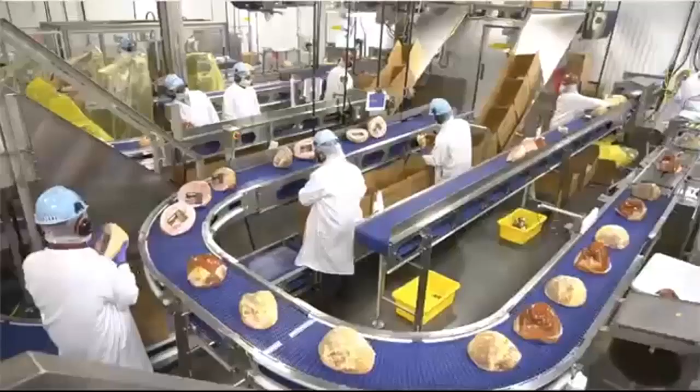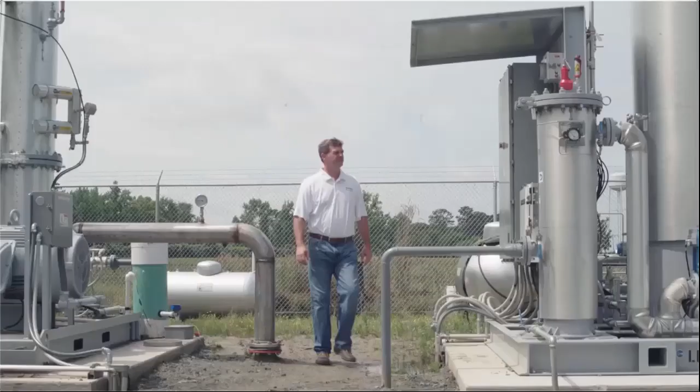At Smithfield Foods, we're dedicated to producing good food responsibly. As a global food company, we're committed to doing business sustainably throughout our entire supply chain. That's one reason why we were the first major protein company to set an ambitious goal to reduce our greenhouse gas emissions across our entire supply chain 25% by 2025. To reach that goal, we created a new platform called Smithfield Renewables, which we use to ensure we make our carbon reduction goal. As part of that, you'll have biogas projects, fertilizer optimization, grain supply chain projects, and a lot of different things that come together.

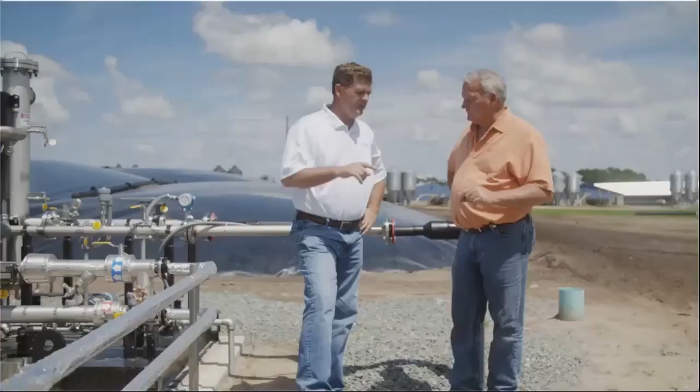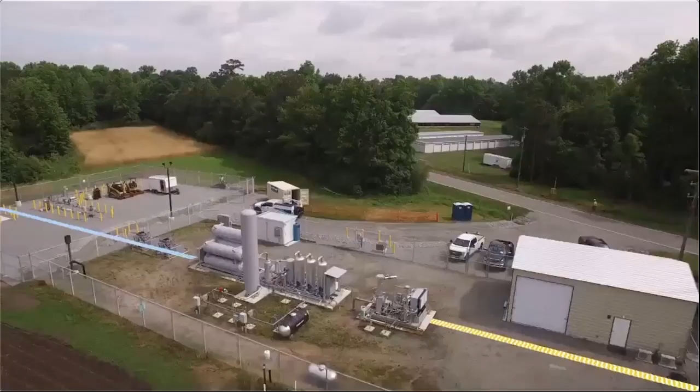We're partnering with local contract farmers and leaders in the bioenergy field for a groundbreaking project underway in North Carolina. Together, we're converting manure from hog farms into renewable natural gas. We capture the manure in the underfloor of the buildings, then that manure is flushed or transferred to an anaerobic digester or covered lagoon where anaerobic digestion takes place and solids are broken down. Once broken down, it releases methane gas, which is captured in the digester or lagoon, then transported to a central processing facility to be converted into renewable natural gas used by our community.

This renewable source is expected to produce enough energy annually to power about 1,000 homes for a year. This is the first time in the state of North Carolina that we've been able to put renewable natural gas from any source into the pipeline to serve customers. We really like this model because it allows farmers, even smaller farmers, to be involved in renewable natural gas production, and we feel this is the most economical way to provide renewable natural gas to customers.

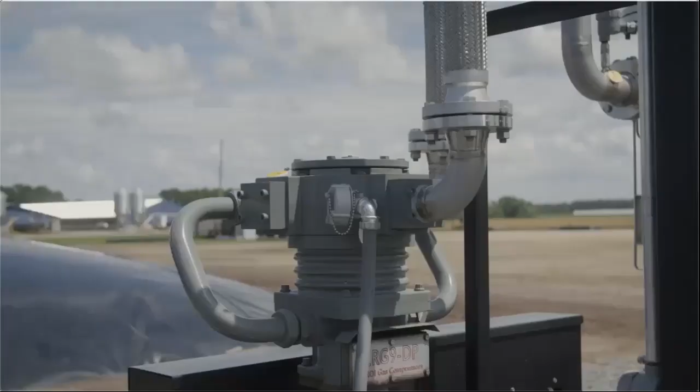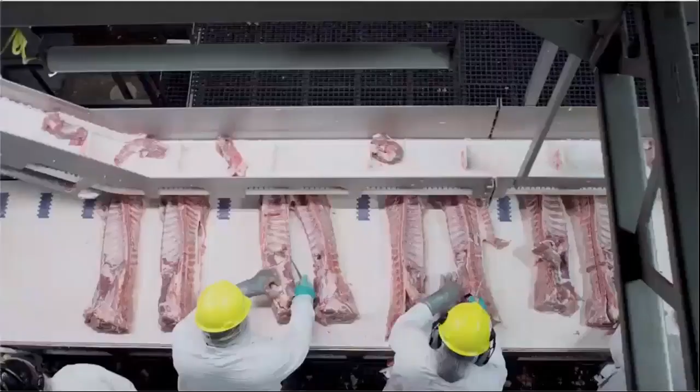John Kilpatrick is a contract farmer for Smithfield Foods who's been operating his North Carolina farm for 40 years. Participating in the project makes both environmental and economic sense for farmers like John. The benefit is the economics, selling the methane as gas, which would normally be a waste product, and why not capture it, use it, make a benefit from it. It's just a matter of putting the pieces of the puzzle together, and at Smithfield Foods, we're putting those pieces together to form a seamless, sustainable supply chain from farm to table.

Our Manure to Energy program is part of that bigger picture. Smithfield has long been a leader in sustainability and innovation in our industry. These types of projects allow us to explore opportunities beyond what we've already done. Learn more about Smithfield Renewables and our other sustainable practices at smithfieldfoods.com/renewables.

Hello, my name is Jim Webb, and I work with Smithfield Foods as the Director of Environmental Health and Safety and Public Affairs. I'm excited to talk to you today about some exciting projects we have going on here in Milford, Utah, as well as across the company.

We all know what natural gas is, but what is renewable natural gas? Renewable natural gas is energy made by capturing methane from hog farms, dairy farms, landfills, and other sources. It's the cleanest energy in the U.S. because it removes more greenhouse gases from the atmosphere than it releases. It's also better than zero carbon—it's actually carbon beneficial. So these projects produce greenhouse gas reduction, clean energy for customers, a revenue stream for family farmers, and improved waste management.

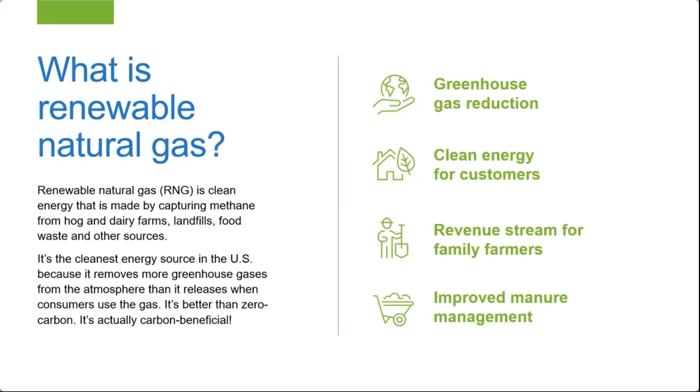In order to create RNG, we first capture the methane from the farm by collecting it in large anaerobic digesters. Then that biogas is taken to an RNG refinery where all the impurities are scrubbed out to create a 99% pure methane stream. That RNG is then delivered to homes and businesses by an existing utility gas pipeline.

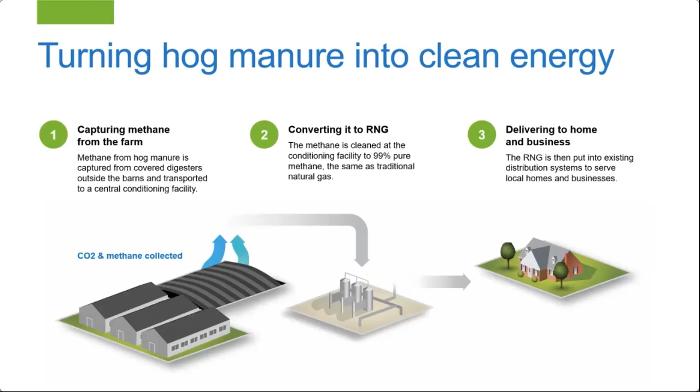In 2018, Dominion Energy and Smithfield Foods joined forces to create Align RNG, and they committed as part of that joint venture to invest over $500 million over 10 years to capture methane from Smithfield's hog farms, which is enough clean energy to power more than 70,000 homes. The 4 initial projects are in North Carolina, Utah, and Virginia, with more projects to come.

At the first of this presentation, we watched a short video on one of the projects going into North Carolina. We chose to show that video not because it was of Utah, but because the principles contained in that video are very similar to what's going on here in Utah.

Let's talk about reducing greenhouse gas emissions. RNG is carbon beneficial because it removes 25 times more emissions from the farm than are released when customers use the gas. Over the next 10 years, Align RNG will reduce greenhouse gas emissions from the Smithfield farms by about the same amount as taking 500,000 cars off the road or planting more than 40 million new trees each year.

RNG produces clean energy for consumers. RNG provides reliable energy 24/7, unlike a lot of the other renewable energies like solar and wind, which only produce during the light or windy times. RNG will provide energy around the clock.

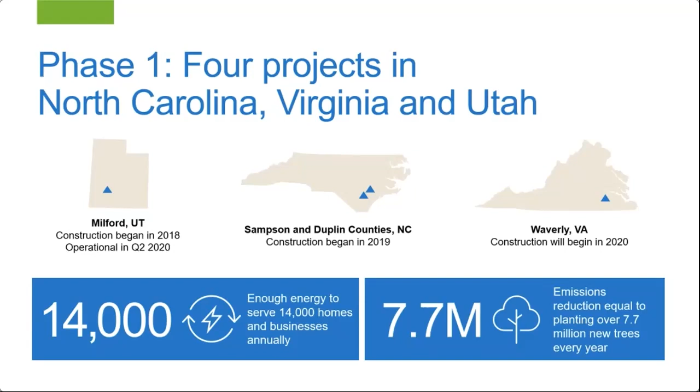I'd like to talk about the project we have in Milford, Utah. Of the 4 projects we currently have going on, the Milford project is the only one that we started from a clean slate. These farms were built specifically with digesters in mind, and they were brand new. The other 3 projects were all retrofits on existing farms and existing lagoons to create anaerobic digesters. So Milford is the first one.

In Milford, we have installed 26 different farms. Each one of those farms has a permitted capacity of 9,200 hogs.

Those digesters have now been in operation for about 1.5 years. We've had some issues with them, mainly that we put in a lot of fresh water. In order to install the cover, you have to install it at a certain level, so we had to put in a lot of fresh water. Because of that, it took a little while for those digesters to really start taking off. We had to seed those digesters with some dairy manure to create methanogens, so it would digest the manure more efficiently and produce the gas. But that has now been done, and we are seeing good gas production.

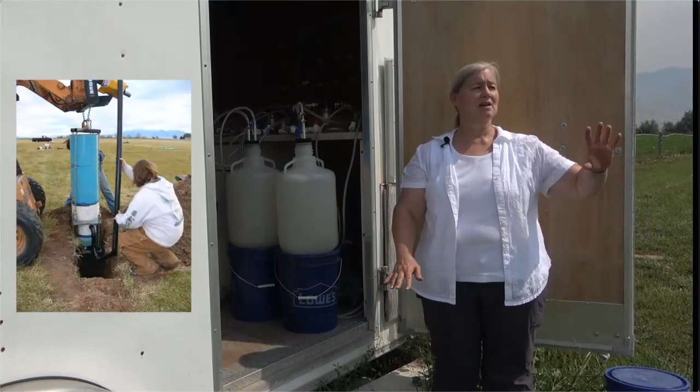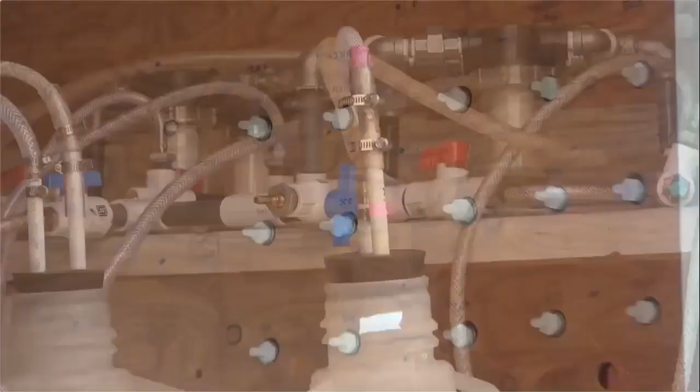Those cores went back into the ground where they were. We have PEX tubing running from various locations in the field all the way up to this trailer, and you'll see we have these little access ports on the wall. We then put a vacuum onto those ports and pull out the leachate collected in the reservoir, and collect it in these big bottles here, then take that back and analyze it for the nitrates and phosphorus being leached in the system.

So the beauty of the zero tension lysimeters, installed in the field many years ago, is that we can actually plant and till over them without disturbing them. They collect all of the leachate through the whole year. So even in the winter when we can't get out here, the leachate is moving down past that soil root zone into the reservoir, and as soon as we can get out here in the spring, we collect that leachate. That way we collect all of the leachate through the whole year.

What we do see is huge flushes of nutrients being moved through that soil profile with the snowmelt. And we get a fair amount of snow here, so that's always a big issue each year. So that's one of the things we really want to look at.

Here we are at one of my suction cup lysimeters. We have these in every paddock in this pasture. The suction cup lysimeters are a PVC tube with a little ceramic cap down at the bottom. Those tubes are about 3 foot deep, and we actually have them covered with a metal plate.

Inside, an irrigation cover, and then in there is a rubber tube access port. We pull that little ring off, put a little tiny tube down the suction cup lysimeter, put a vacuum on it, suck out the leachate. We then put a new vacuum back onto that tube, close it off and seal it back up for the next week. That's how we collect our leachate. We collect these every week during the grazing season, as early in the spring as we can to as late as we can in the fall.

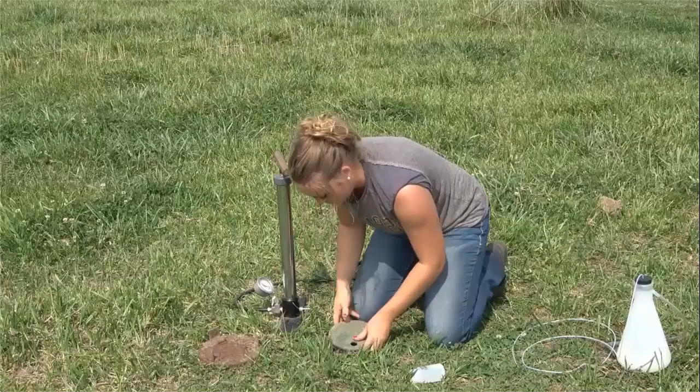But during the winter, we are not able to collect leachate on the suction cup lysimeters. So here we are at our root cages.

We're actually looking at how the plants grow and how the roots, how much of a rooting system there is, how deep that goes, because we think that may help explain why some forages are better at utilizing the nutrients than others. In these cages, which just protect our tubes from the heifers, we have acrylic tubes with a little cap, and a little black styrofoam tube that goes in to help prevent any light from intercepting, because light down there would change how those roots grow.

We then take a circular scanner, drop that down the tube, and take a scan of the roots at 1 foot increments, going down for 4 feet. We take those back to the lab, stitch the images together, and trace them. We can measure the root diameter and root length, and hope that will help explain what's going on, or some part of it, as to why some forages are better at utilizing nutrients than others.

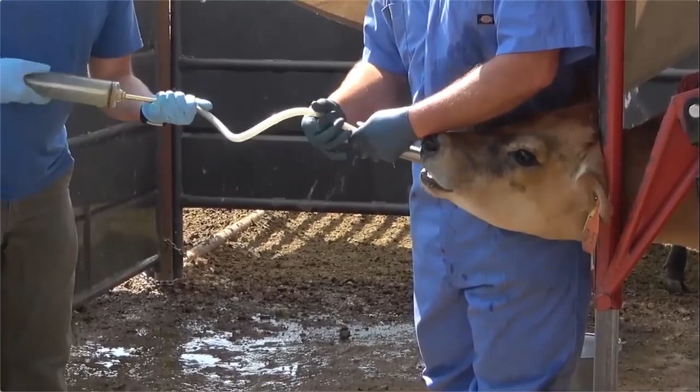A couple of specific research endpoints we're really excited about: one is to evaluate the rumen health of these animals. We know that the inputs that go into the rumen can have a dramatic influence on the rumen microbe population and overall rumen performance and health, which is essential for growth and performance of these animals.

So every 35 days we've been going into these Jersey heifers and pulling rumen fluid, trying to monitor changes over time as these animals come from a feedlot setting and get put onto grass, but also looking at overall rumen health characteristics, such as rumen pH and rumen contents.

We will ultrasound them to identify their reproductive status, whether they have initiated their reproductive cycles or not. We'll monitor their internal reproductive organs, as well as external indicators of puberty and development, such as the mammary gland, and tie those together with hormone data gathered from blood we pull from these animals, as well as reproductive behavior data from the pedometers and other biometric endpoints.

In fact, at the end of each research year, as we bred those animals, we saw very little suggestion, in fact no suggestion, that the higher protein content of our mixed pastures was doing anything to compromise the reproductive performance of these animals. This has been, as I mentioned, a 3-year project so far.

We also have a variety of local and regional producers involved, stakeholders who provide a wealth of information and suggestions as we meet with them regularly to discuss this project. One question that almost always comes up is, how will my Holsteins, for example, or other breeds of cattle, respond in the same way as these Jerseys? We know there are breed characteristics that set these breeds apart, both in growth, performance, their response to forage, and different dietary considerations.

So that's something we'll probably undertake starting next year, and perhaps moving forward if we can attract funding, to look at some of the same endpoints: reproductive performance, nutrient cycling, growth performance of the animals, yields of the pasture, dry matter intake, and a variety of other parameters that would help us understand whether different breeds of cattle perform differently in a grazing setting as far as dairy heifer development goes.

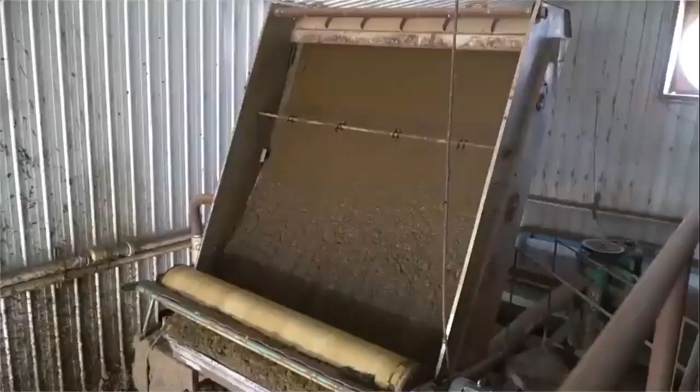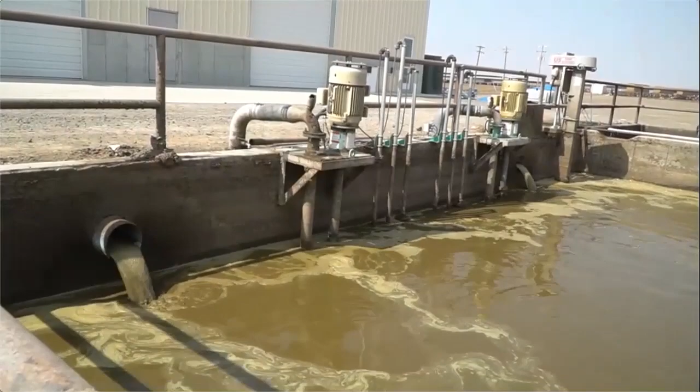In addition to milk, dairy cows produce urine and feces. These byproducts are collected, and they'll typically go through some sort of separation technology to help separate the liquid from the solid. Next, these byproducts, which are either manure, compost, or lagoon water, can be land applied. These byproducts are not waste products. Even though we often refer to them as waste products, they have a lot of value, specifically as fertilizer. They contain a lot of soil and plant essential nutrients, such as nitrogen, carbon, potassium, and phosphorus, as well as other micronutrients.

However, these dairy byproducts don't necessarily contain these plant essential nutrients in the right ratio to grow crops. For instance, when you apply enough compost or dairy manure to supply enough nitrogen to grow a crop like corn silage, you're over applying phosphorus and potassium. While not inherently dangerous, eventually this can lead to water quality impacts. However, if you apply these nutrients at a phosphorus or potassium rate, your crop will need more nitrogen to reach its full potential and have the highest yield.

Next, we're going to hear from Marcia Niebling from Niebling Consulting about some challenges that dairymen face here in southern Idaho in regards to managing their dairy byproduct nutrients.

I'm Marcia Niebling, and we've lived here in the valley for 28 years. I started this business in 1998 as nutrient management planning and the whole system was developing. Since then, I started out working in Idaho with dairies, and I've expanded to work also in Washington and Oregon, and it's been very interesting work.

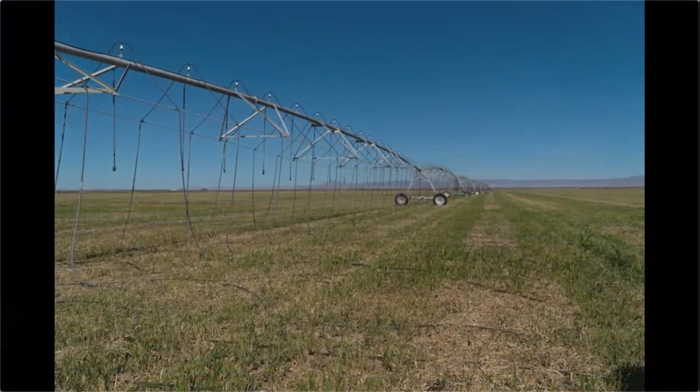Basically around here, we have very low organic matter in the soil, so it doesn't hold water that well, and it's very, very low, like in the 1% range. So they like to get the manure, because there's no minerals in there either. Phosphorus doesn't hurt them at all, they need the phosphorus, they need the nitrogen. It takes years in the soil to become fertilizer, but the guys that are taking it are patient, and they realize that they got this white dirt that's low in organic matter and it has no bottom under the pivot tires, and they all say that by routinely applying manure, it kind of helps some of those problems.

Every single year we've kind of been reevaluating because of the forage needs and the water issues. I think we get back to where we need to be. We'll probably stick to rotating 2 pivots of triticale and Sudan grass, and then 1 pivot. We'd probably like to keep 1 in Italian ryegrass and 1 in corn. So some kind of rotation, we don't want to keep the same thing going all the time. But we don't really have a set rotation at this point.

As far as phosphorus and nitrogen uptake, corn does not do a real good job. The numbers in the book do not apply at all to what it actually does. Sudan grass is also a warm season grass, but it comes in when the ground's warm and ready, and it pulls nitrogen really well. Triticale, all cold season grasses really pull nitrogen and phosphorus out of the ground. And when you can throw Italian ryegrass into the mix, it really uses up a lot of nitrogen.

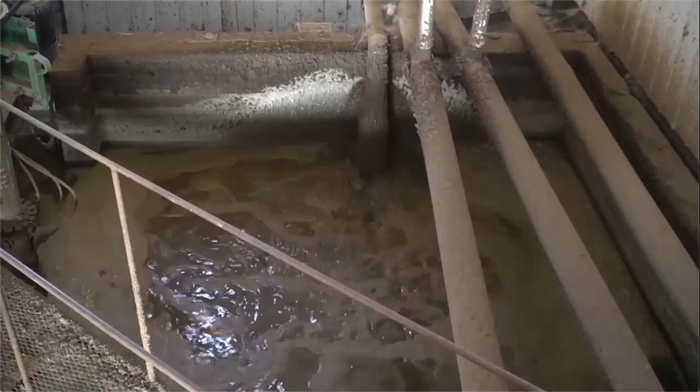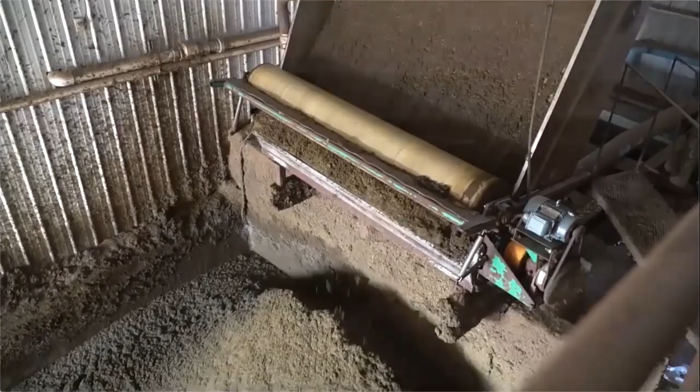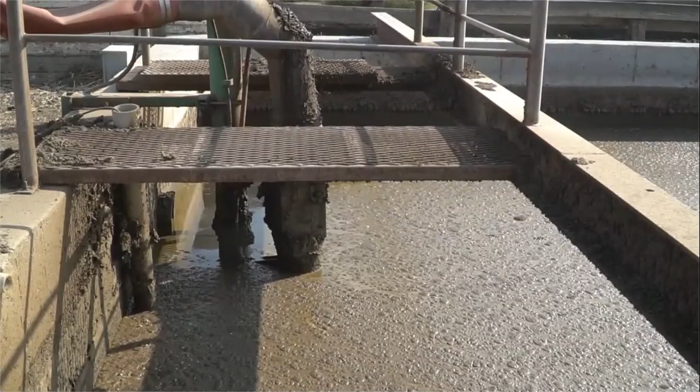When a lane is flushed, it goes down to the first receiving pit. The first receiving pit pumps over some coarse screens, which gets the initial solids out. It then flows from those screens down to a bottom removal pit, which we call it, shaped like a V at the bottom with a pipe, and that pump turns on again based on fill to pump off the bottom solids that have settled, off to another pit that in turn feeds the centrifuge.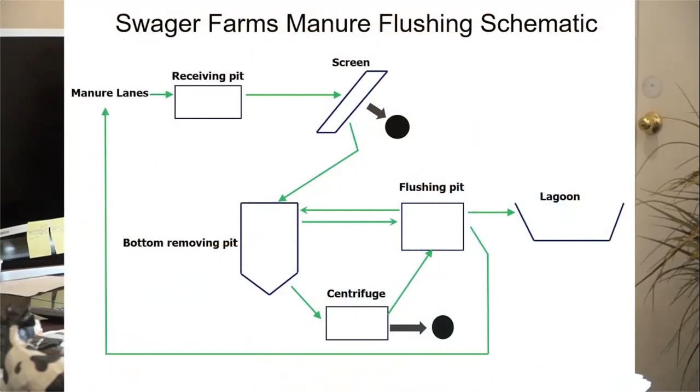The centrifuge runs at about 250 gallons a minute, which polishes the water, taking out the solids that the coarse screens have missed. The reason we have coarse screens is to take out the initial solids and any debris that might damage the centrifuge. After the centrifuge, it's back in the system once again to be reused for flushing.

I don't know exactly, but I would say probably 7,000 to 10,000 gallons, based on how many minutes the flush pump runs for each particular lane. There's, I believe, a 12-inch pipe from that flush pump up to the top of the dairy that feeds the valves up top.

Give or take 7 to 10 minutes of run time. The lanes that the cows eat in versus the back lane of the beds have about a 2-minute differential there, because most of your waste is going to be where they eat.

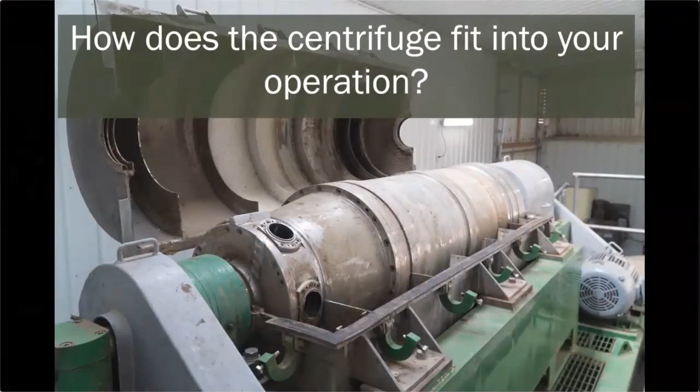Clean water comes this way and the dirty solids go that way. It comes in through that pipe there, and that particular pipe runs all the way down here with different places that it injects.

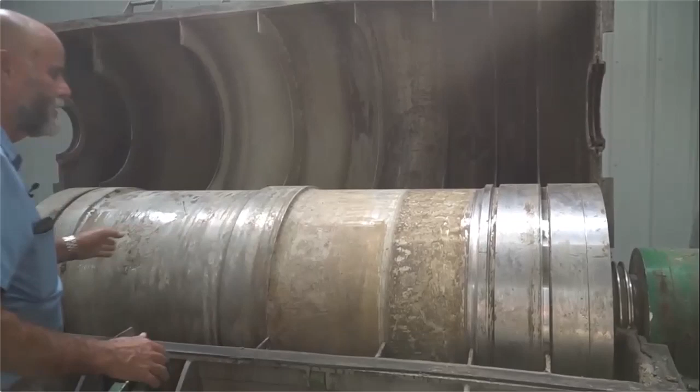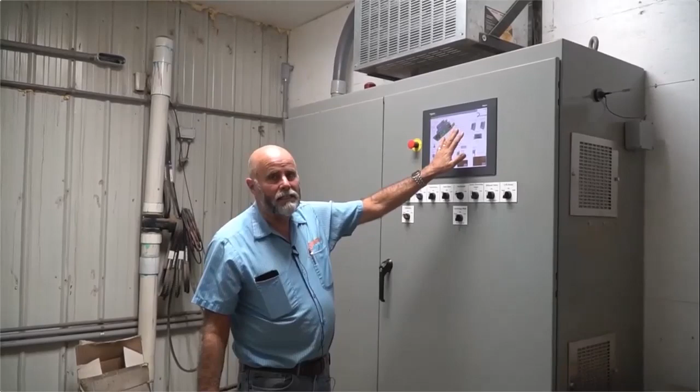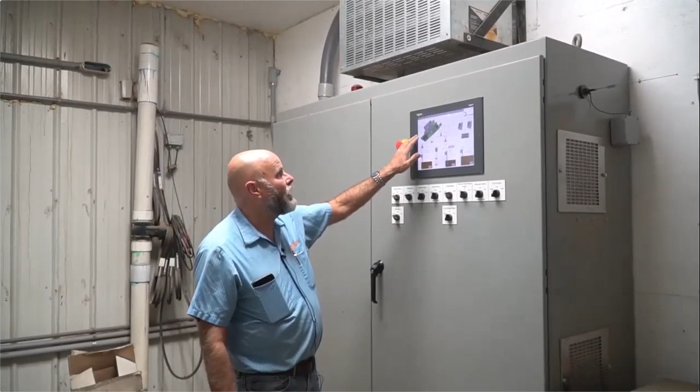Now the auger on the inside is regenerative because it's always trying to hold back. If the main barrel is running at 1,600 RPM, the auger, all controlled by the PLC, might run at 1,590 RPM. So it's always holding back, and that horsepower is actually regenerative. If the main drive is pulling like 85 amps, the back drive is pulling like 35 amps, and it's actually taking away the amps that are on the larger motor. So it doesn't take as much power as one might think.

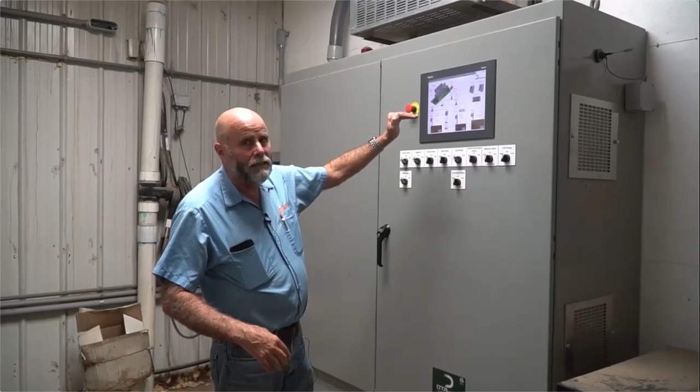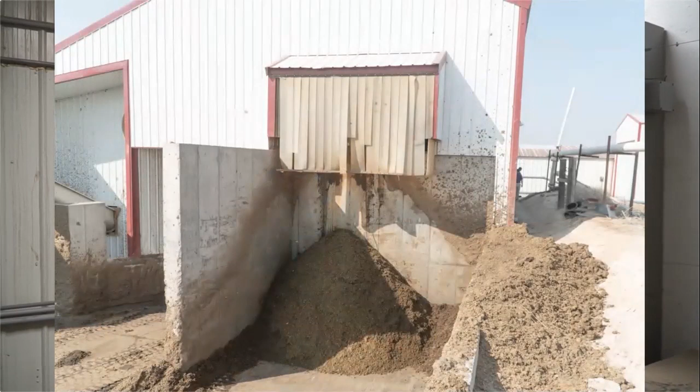Now, the operation of the centrifuge: the auger on the inside, when solids are spun, they're spun and they stick to the outside, just like your washing machine does with your clothes. That auger, turning a little bit slower, pulls those solids at a constant rate and brings them up an incline inside the centrifuge, and it gets drier as it goes. So when it finally ends up dropping out of the centrifuge through nozzles on the end, it's dry enough to make a coned pile off the end of the centrifuge.

Eight loads from the primary screens and probably 4 from the centrifuge every day. I would say prior to the centrifuge, we were probably only getting between 5 and 6 loads total per day. Once we put the centrifuge in, the primary screens worked so much better, and also we were removing all the fine fines that were always so hard to get.

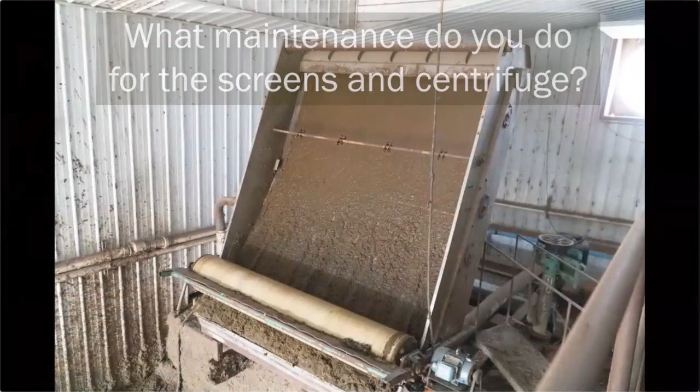Once a week we pressure wash our screens and acid treat them whenever necessary. The centrifuge goes down once a week and we grease it because there's bearings on the inside of it, and there's a proper method of maintaining the centrifuge. Basically, the centrifuge doesn't require a lot of maintenance other than once a week, mainly greasing.

I don't need to clean my lagoons hardly ever. Before, it was a full-time job to stay ahead of lagoons. Every year I was cleaning at least one lagoon, and now that's not necessary with the centrifuge. With the centrifuge, you can see the tire tracks at the bottom of the lagoon that you cleaned from the year before, the next year.

Absolutely. I think every dairy farm could utilize the centrifuge in some way or another.

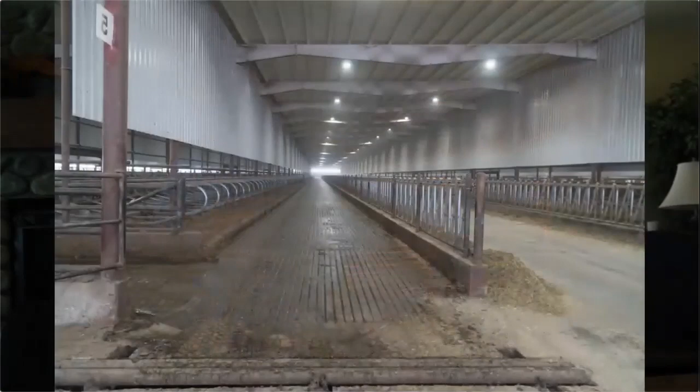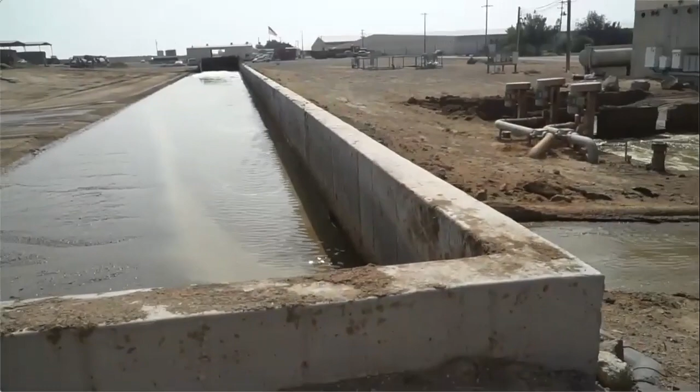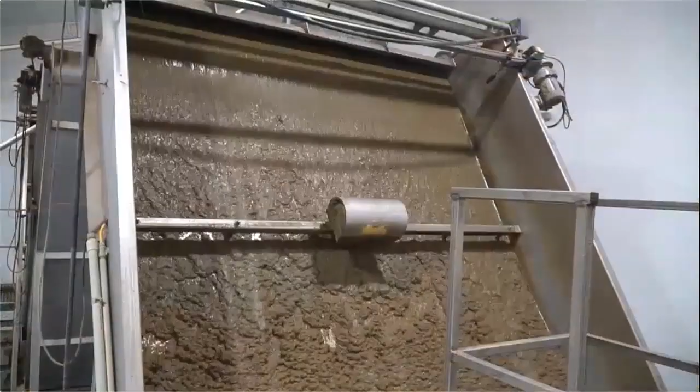At Dairy One, the process flows from the cross vent being vacuumed, dumped into a pit where it is mixed with parlor water. From that point, it gets sent over a sand lane to try to desand as much as we can. From there, it is dumped into another reception pit. From that pit, it is pumped over 2 sets of slope screens. The 2 slope screens then pump it out into the next pit, and from that pit 2 more pumps pump it back over 2 centrifuges.

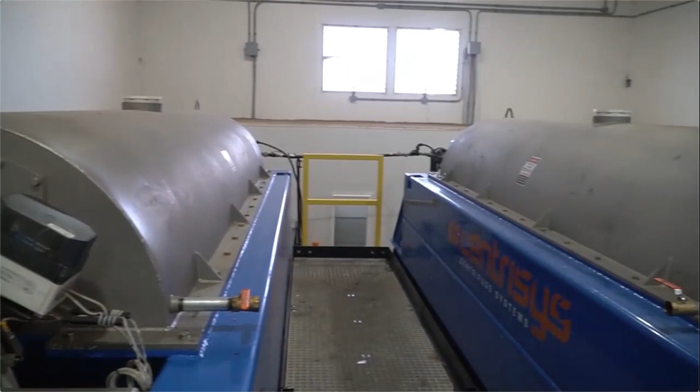Both centrifuges and slope screens are parallel with each other. From that point, it leaves the centrifuge and dumps into another pit, and from that point it is pumped up to the lagoon.

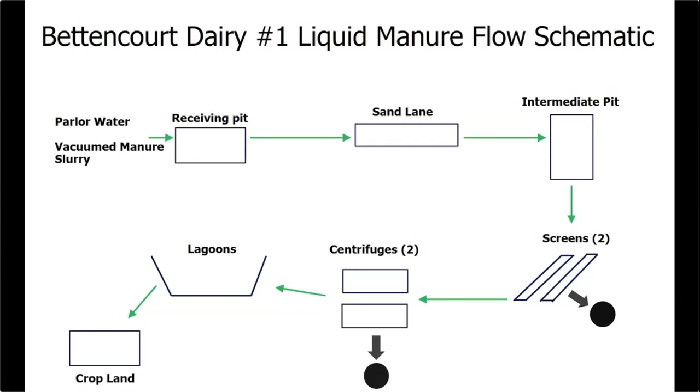We are processing approximately 700,000 gallons of water manure a day through the slope screens and centrifuges.

The sand lane is cleaned twice a day. In all reality, it could probably be cleaned 6-7 times a day. It's just labor intensive, and you have to hit it when the sand or the flush lane isn't running, so it's a timing issue.

Yes, no water is brought back onto the dairy. It all goes to the lagoon and then through a pivot system pumped onto our fields.

Approximately 22 tons a day from the slope screens of fiber. 20 to 25% of that, 100% of it is composted, and then 25% of that is used for bedding, and then the remainder is shipped off-site, sold, or used on some of our other fields. From the centrifuge, the cake, we're approximately 24 tons a day. The reason there's so much weight is just the sand dropping out and hauling that off.

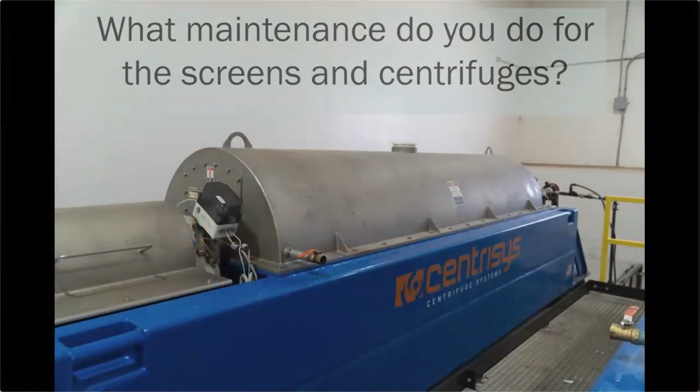The screens have an auto washing system that runs approximately 6 times a day. That is really how we keep the screens running at the pace they're running. If we didn't have the auto wash, I'd have to have a guy come in 6-8 times a day and manually shut it down and clean it. If it were to fail, you've got about 12 hours to get it going again, else you'll be out there cleaning it. From there, it's cleaned weekly through the screw presses and everything underneath, just maintenance, cleaning up any residual manure that's fallen over.

But once a week, roughly, we tear it down and put it back together. The centrifuge, once a week, we have a company come out and shut down each centrifuge and clean it. There's a flush system that goes through it. From there, they check the oils. It's got an air pressurized drip system to lubricate the bearings. And then the plan, or the budget, was once a year to do a bowl exchange, where they come out, pull it out, and put a brand new rebuilt one in from the factory.

Right now we went 15 months, so we're doing better than we realized. When we added the second centrifuge, we think we'll do even better. We're not going to be hammering those centrifuges as hard.

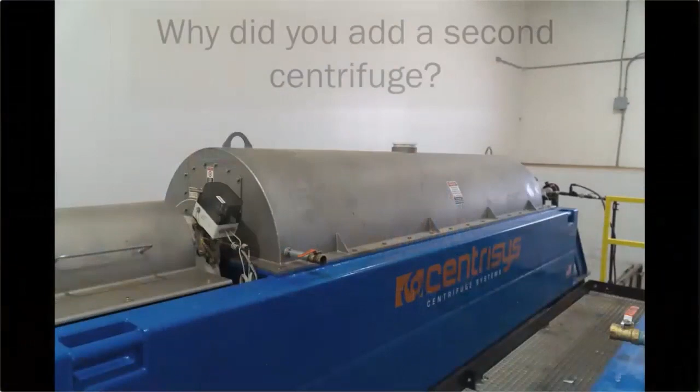So the second centrifuge was added after—our goal was to capture all of the water. With one centrifuge, we were able to screen all the water, but we were not able to run the water through the centrifuge completely. By adding the second one, we were able to slow down the amount of water coming in, speed up the centrifuge, and our capture rate increased—not only from the extra 150,000 gallons we're capturing, but by slowing it down we were able to keep that water in the centrifuge longer, spinning more particles out. We're guessing that increased it by about 2 million pounds more a year, just by slowing it down, not by adding the extra centrifuge, just by slowing it down and capturing more particles that were going out to the lagoon.

The hopes were we can go from conventional open lot once-a-year cleaning of the lagoons, with the slope screens and then the centrifuge added on—that's 440,000 pounds of manure that you're trying to not have to pull out of that lagoon. Fuel, labor, a lot of other issues come into it. So going to every 3 years will easily pay for the second centrifuge.

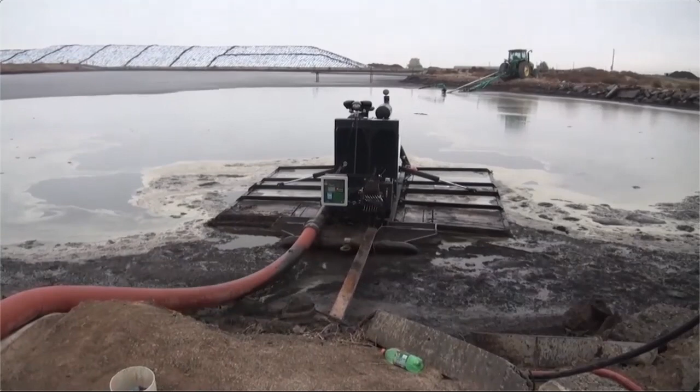Hi, I'm Dr. Mario de Haro Marti, Extension Educator with the University of Idaho in Gooding County. This video will discuss two techniques available for dairy producers to reduce ammonia and odor emissions and better manage the distribution of nutrients. First, we will showcase a manure drag hose and subsurface injection system used by a dairy producer in southern Idaho. Then we will highlight an experimental zeolite filter that the same producer helped test in his facilities.

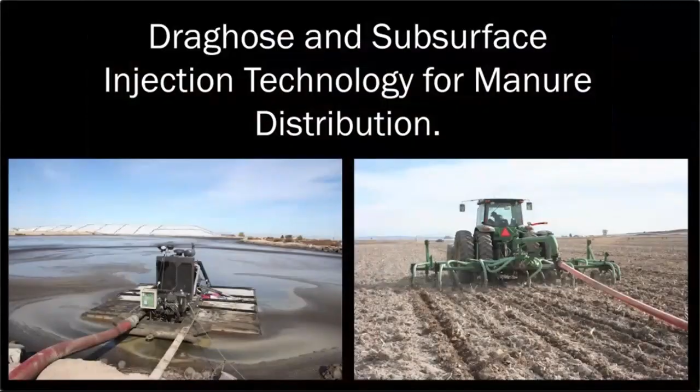Drag hose and subsurface injection consist of 4 distinctive parts. First, a way of mixing the liquid manure storage pond to get as much as possible of the settled solids, to mix and create a slurry that can be pumped.

Second, a pump that can handle the slurry and pump it at considerable distance. In this case, the producer uses a floating pump that serves both functions, mixing the lagoon, then switching to pumping the slurry manure into the drag hose.

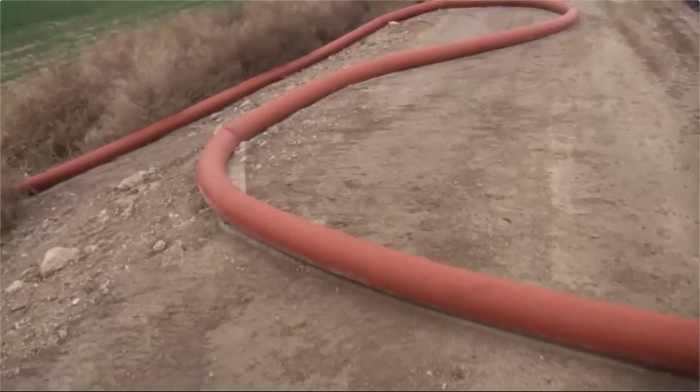The third element is the drag hose itself. The hose transports the slurry from the pond up to the injection tool. Those hoses are designed to support high pressure and to be dragged through the fields.

The final component is the injection tool. This implement distributes the manure received through the hose into injecting tubes and tools that can go several inches below the soil surface and inject the liquid manure where the crop roots will be. You can see how no manure is visible on the surface.

Using a drag hose and subsurface injection system allows livestock producers to better manage their lagoons, applying manure slurries and their nutrients closer to where the crops need them. It also reduces ammonia and other emissions.

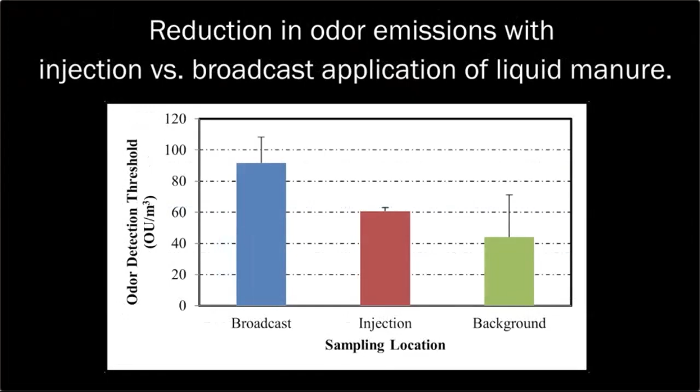Let's hear from Dean Swagger, the dairy farmer using the drag hose and injection system on his dairy farm.

Hi, my name is Dean Swagger, and I own the farm here. We have been here in Idaho since the year 2000. Prior to that, we dairied down in Southern California in the Chino Corona area. This farm was started by my father in 1945 with a small number of cows, and it's grown into what we see today.

Today we milk about 4,800 cows, and we have 2 facilities, approximately 1,000 acres in total, which we farm also, growing some of the feed for the cows. And, in a nutshell...

The reason I purchased the drag hose is because it's a tried and true technology that's been used for many years, more in the eastern states than here. But if it works there, why wouldn't it work here?

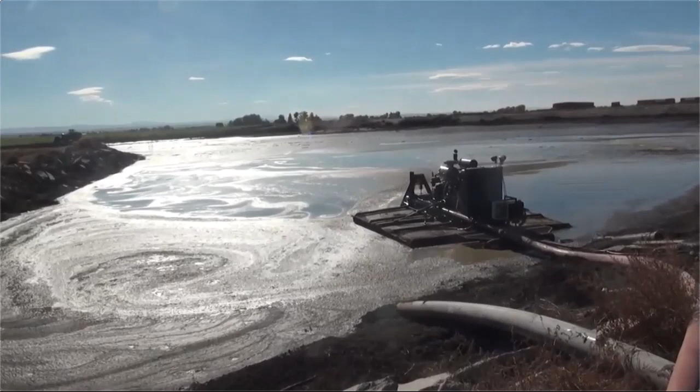I needed a better way to not go into the lagoons and disturb the bottom with heavy equipment, and also a way of removing that slurry without using a year's worth of drying, even in ideal conditions, to get that slurry dried up enough to where it can be hauled out.

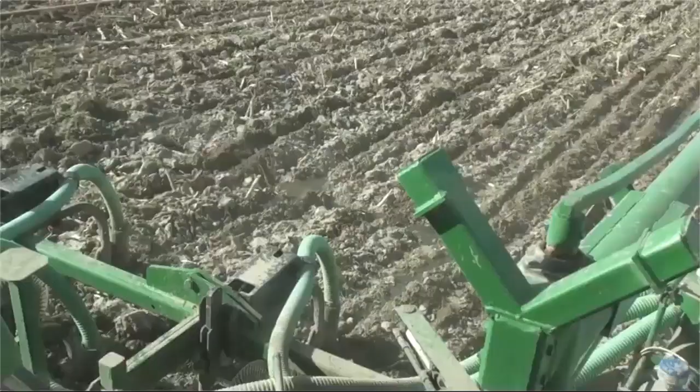With this, I can use the system we already have. You just put the boat in there and start pumping. There's no prep involved in this, and nobody is covered in cow manure at the end of the day.

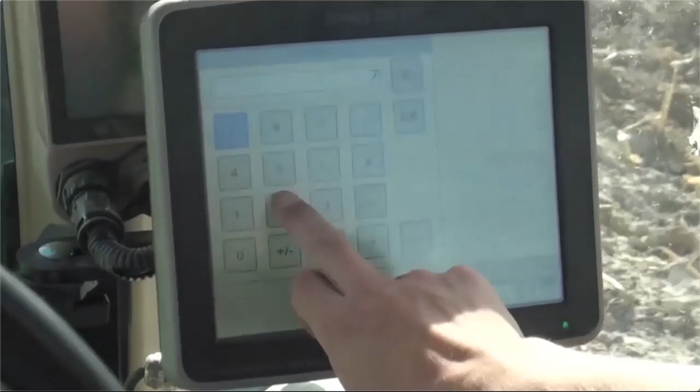It works, and it also, with the drag hose system with the injector, puts the nutrients where you need the nutrients, not on the surface. It puts it down below where it's plant available.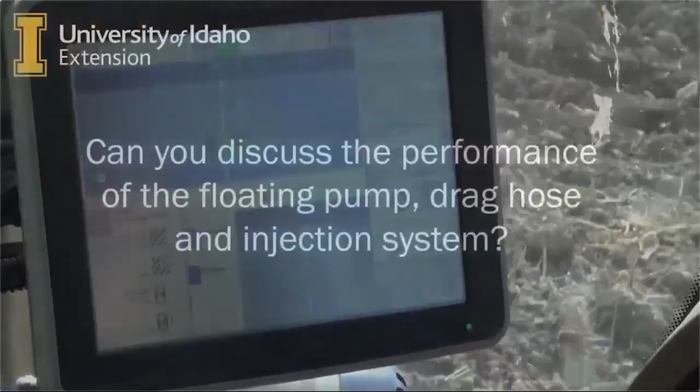I think we're running right at about, on a good day, about 1,000 gallons a minute through the injector. So we can put a lot of product on in a short amount of time. It works very, very, very well.

Diesel - you know, it's only something that's being used maybe a month out of the year. The cost, there is maintenance, of course. You got your diesel, oil changes, filters.

I think the most consumable item is your drag hose itself, the last 400 feet or whatnot of it that physically drags across the ground, because you're pulling it with a tractor and an implement. That hose is probably $3 a foot, and it probably lasts about 3 years.

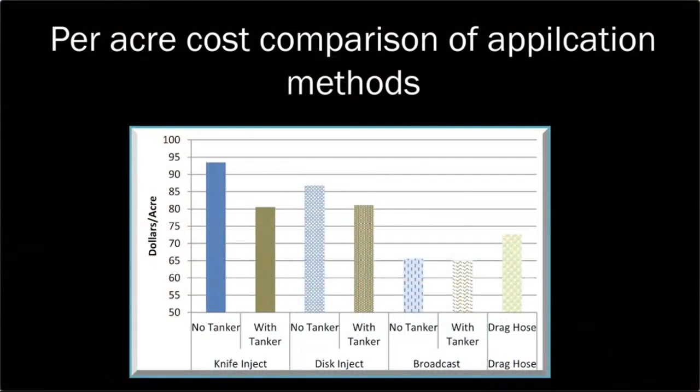The year prior to buying the drag hose system, I used Tankers, a custom company, to come in and pump out a lagoon or two. I forget what it cost, but with the cost of that versus the cost of the drag hose system, I can probably pay it off in about 1.5 to 2 years.

I could go on for a while on that. Benefits is peace of mind, that you have the capacity. You once again have the capacity in your lagoons after you're done.

Your nutrients are where you want them to be and not on the surface, because a lot of times on the surface you just burn that seed. You put it down below, you know, 10 inches down, where the plant needs it when it's mature enough to handle those sort of nutrients. On and on and on.

Our yields are so much better now on the farm. The crops grown are so much better. They're not affected by, number one, trucks, spreader trucks driving over the top, compaction. Number two is nutrients.